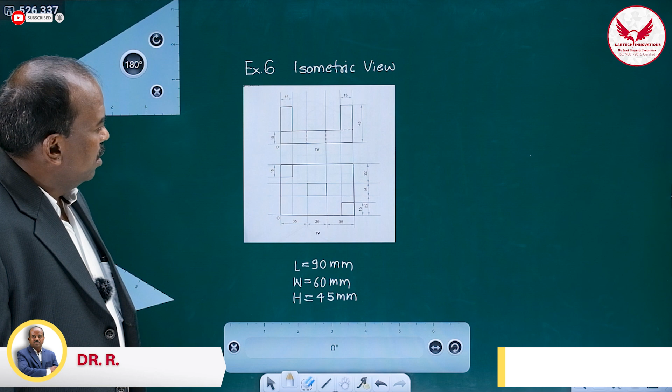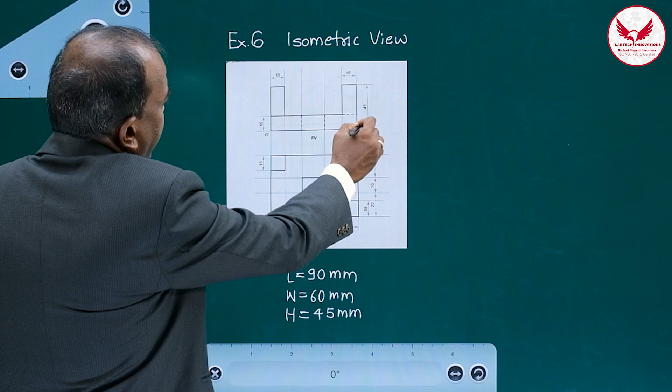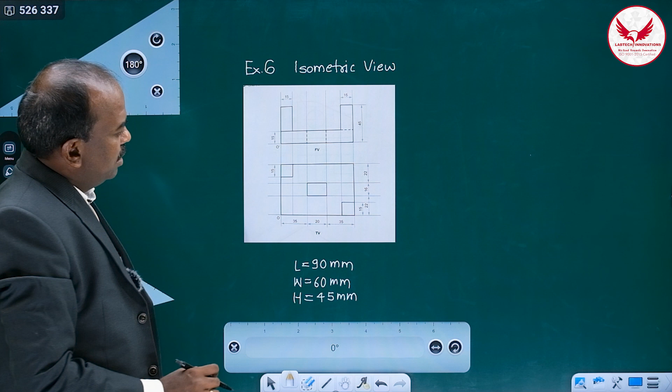Hello friends, now we'll see the isometric view when front view and top view is given. The object in that way is simple, but if we understand the orthographic views thoroughly, then drawing is always very simple. So if we see the length of this object, it is 90 mm, height is 45 mm. I have written length is 90, height is 45, and width is 60. So these three dimensions, while drawing the isometric view, are very important.

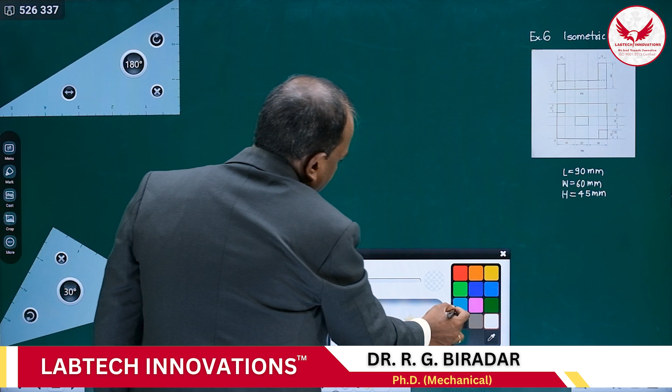And once we mark these three dimensions, then what we can do? I hope all those dimensions are visible. Length is 90, width is 60, height is 45, origin is on left hand side. Then how to prepare the isometric box? Once again, I'll repeat the procedure like earlier examples.

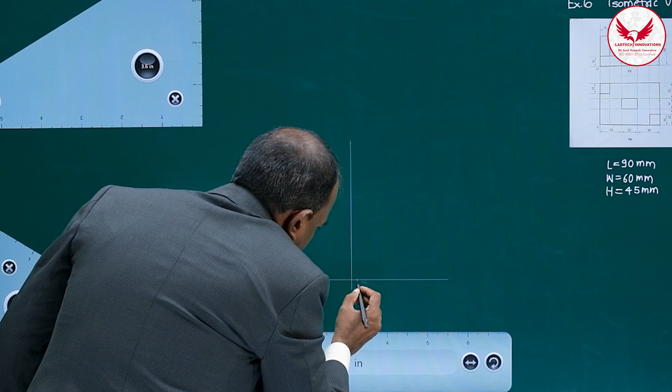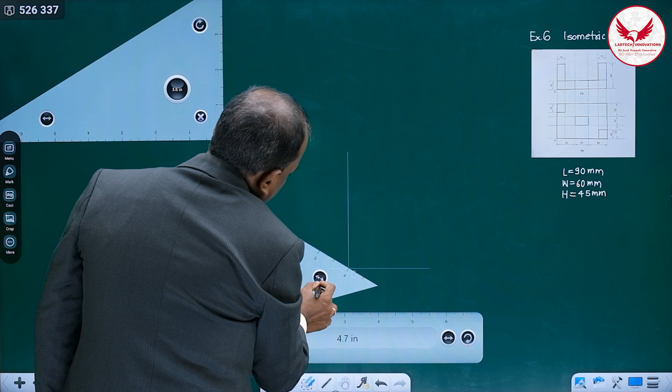Mark the horizontal line, then mark the vertical intersecting line. Once we mark these two lines, their intersection is going to be the origin. So it is the origin. After marking the origin, on both sides of the origin mark the 30-degree lines. So one on this side, and the other on the right hand side. Then after that, marking length, width and height is very important.

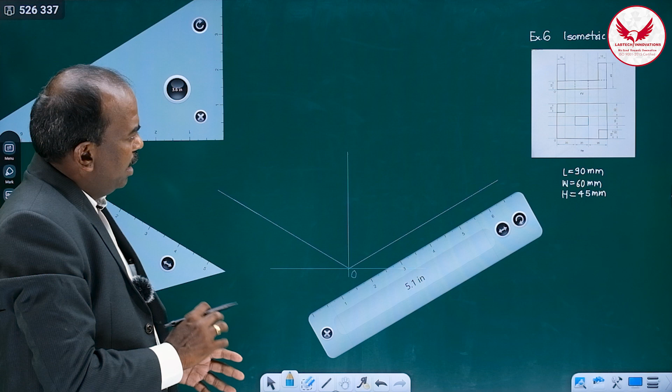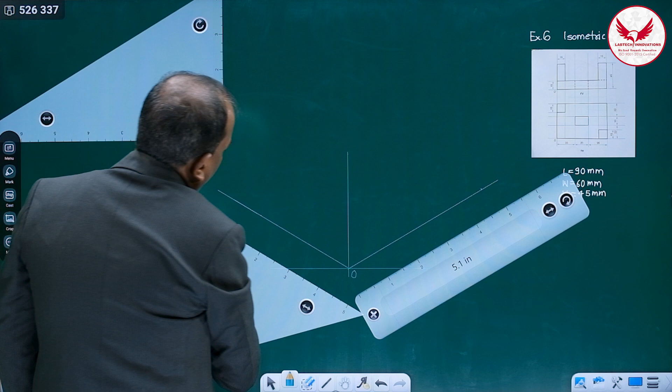Length is 90. We can mark length 90 on this line with the help of scale. So it is going to be 90. Similarly, width is 60. So it is going to be 60. So I have marked length and width, and a very important thing in this is marking the height. Height is 10, 20, 30, 40, and height is 45 only. We can mark the height.

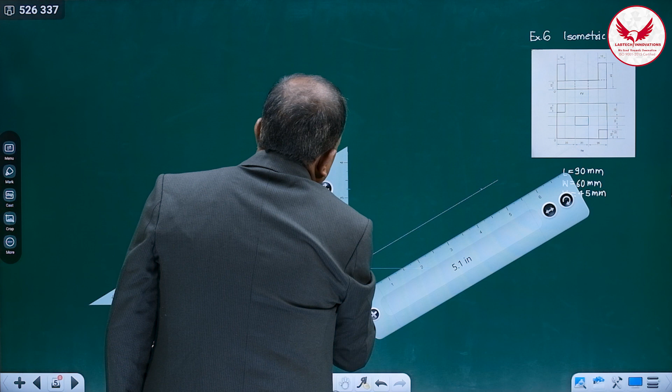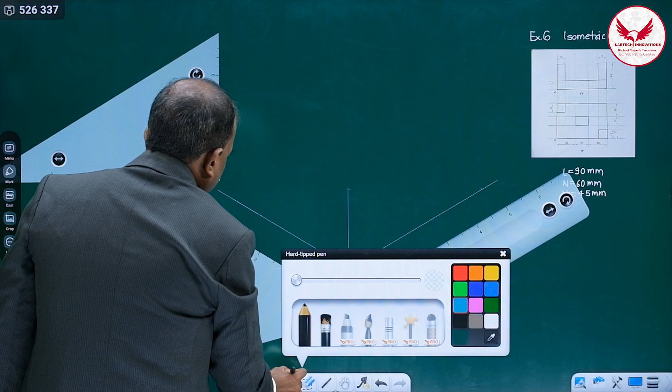And after marking height, for preparing the isometric view very fast, what I'll suggest, once you mark the height, remove the upper portion. It will help you a lot while preparing the isometric box. Wherever you have marked the width, from that draw the vertical line. If you extend it, it will be useful. Again, wherever you have marked the length, from there also mark the vertical lines.

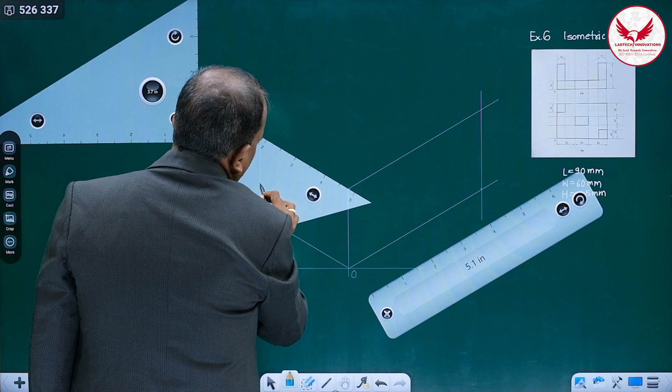Then afterwards, mark the line parallel to the length from this height towards right. Then towards left, it is going to be width. Wherever these intersections are, from that also draw these parallel lines. Even if these lines are extra, no problem, because these are very light. So this is the isometric box, and our object will be in this portion only. It will not be outside this.

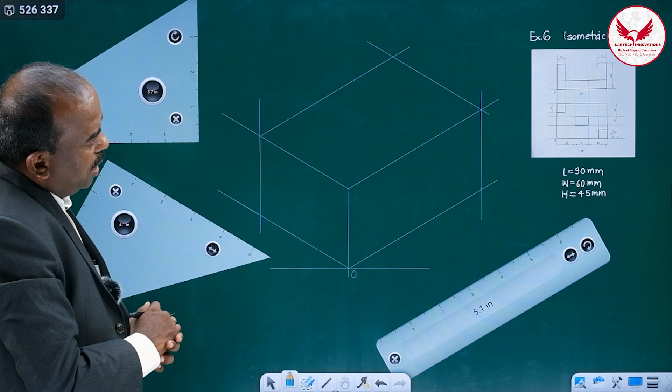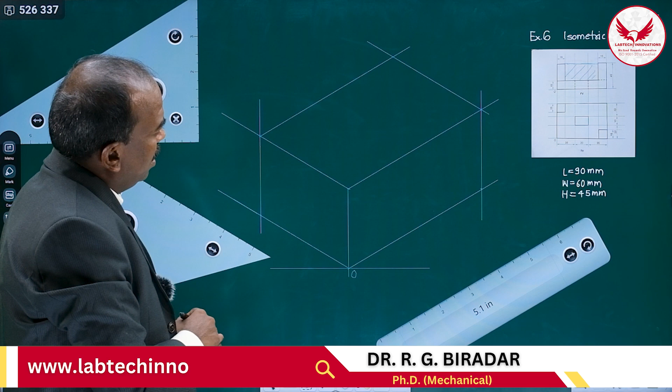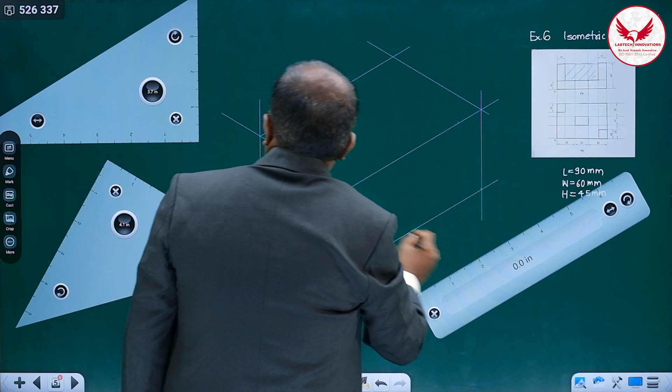Again, one logic I'll use over here. If you see the front view, a major portion of the front view is not existing, especially this portion. So if you find this part is not existing at all, can we remove that portion directly from this block? So we'll get some basic shape. How much can we remove? Leave 15 mm from both sides, 15 mm from this side and 15 mm from this side, and its depth is 30.

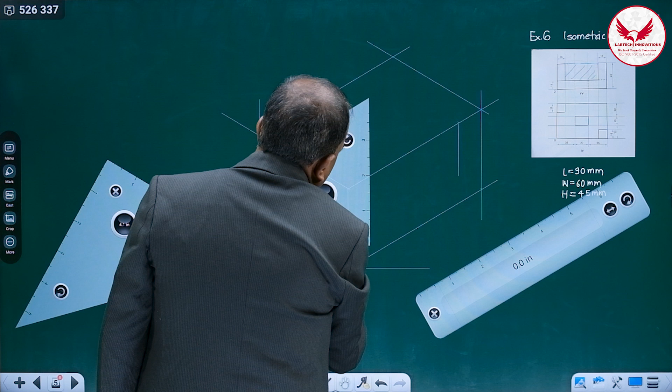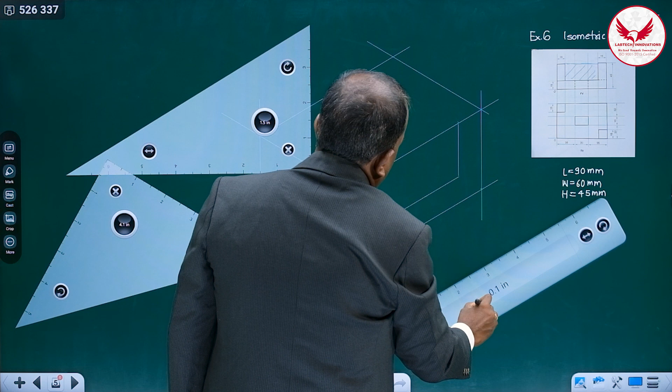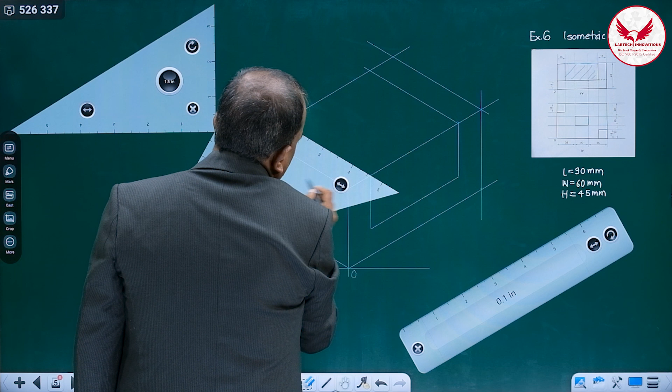Its depth is 30: 10, 20, 30, like this. Means again there will be a gap of 15 on the lower side. So from this side also mark it, 10, 20, 30. Mark this, and this portion we have to completely remove. Whatever this portion is, we have to cut it completely. How can we cut it? Again, parallel lines throughout its width, like this, here also and here also. Whenever there is such a rectangular cut, it is quite simple.

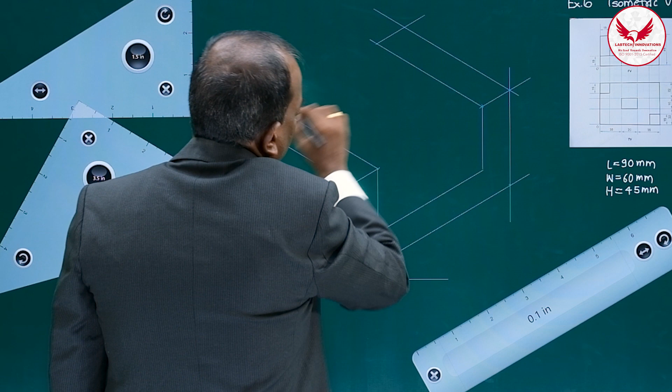But when we have to remove this, what we'll do? We'll cut it. This portion completely we'll have to cut. And then there will be 3 additional lines we'll have to mark, because these are going to be the edges. Here only 2 edges are there. This third edge is going to be there, and its depth is actually 30. 10, 20, 30 means it will be up to this only.

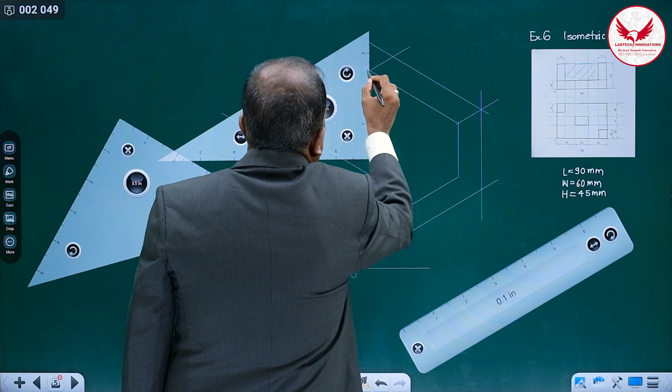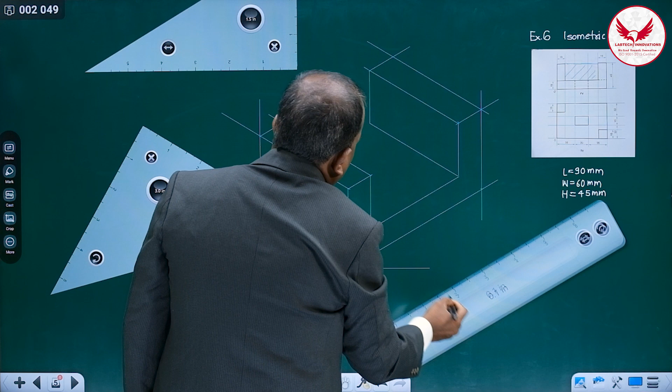So instead of marking extra, if we mark the correct line, it will be better. 10, 20, 30 means from this edge, if I mark, it will match with this, and if I mark this edge, it should be like this. See what I have done. This portion I have removed from this block. It will help us a lot to solve this example in a simple way.

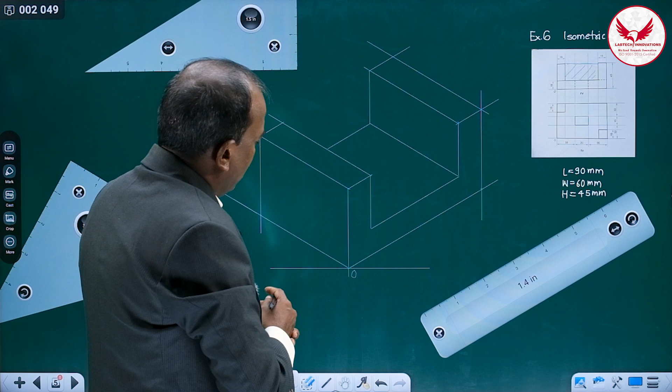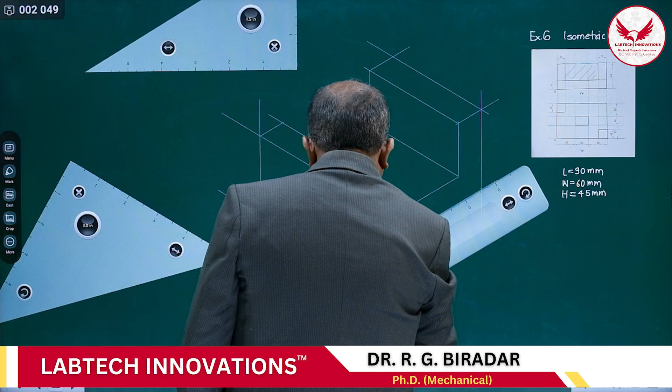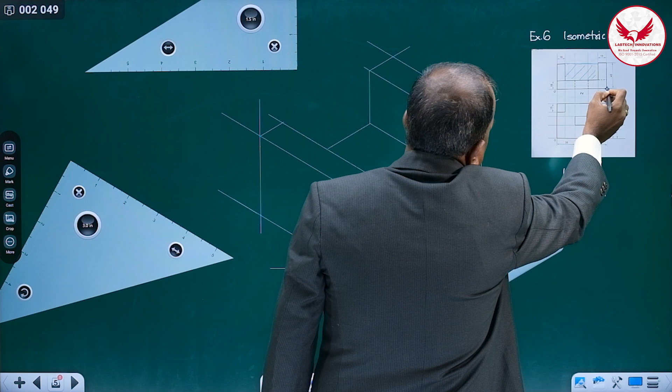Now from the origin, towards right, this line is throughout, it is 90. I'll mark it. From the origin it is 90. Then if we see above 15, this line is throughout. Here there is a dotted line from the completely right hand side, so there is a straight line, means a single surface is there, nothing else.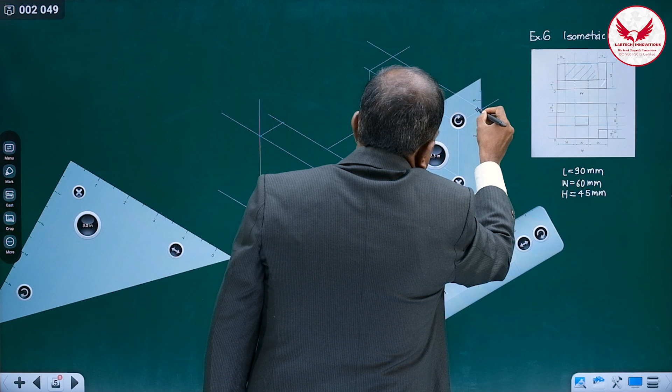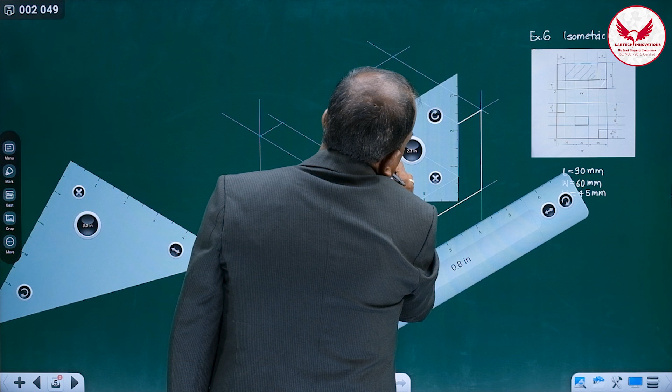So we'll have to mark this line up to this, throughout that 45. And if I mark 45, then it is 15. Its depth, if you see, is 30, and we are finding this line throughout. That means if we start from this, it is throughout.

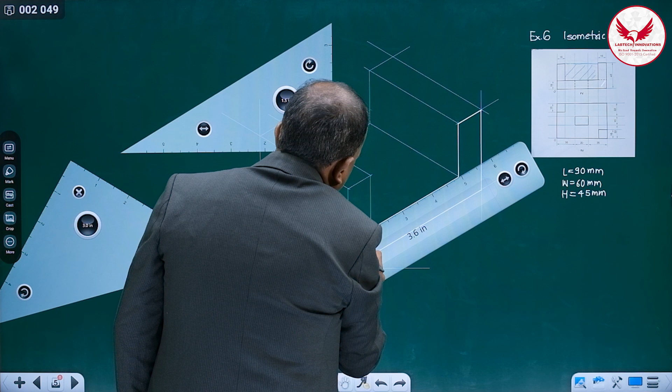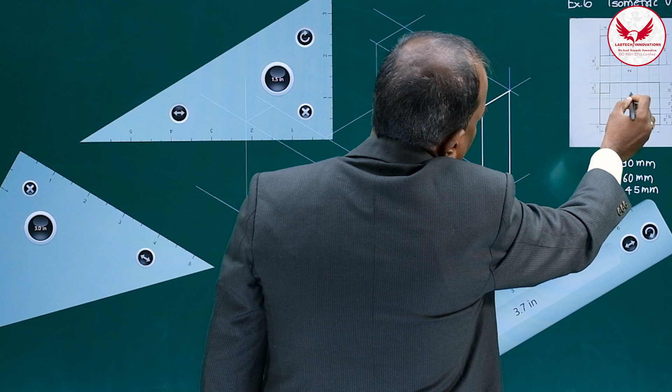So it is like this. And if you see the top view, here there is a square, here there is a square, here there is a rectangle, and that rectangle indicates that it is a hole. Above this nothing is there, means centrally this rectangular slot is there. So this square and square. So now it is confirmed that this square is at the frontal side. The dotted line will be behind.

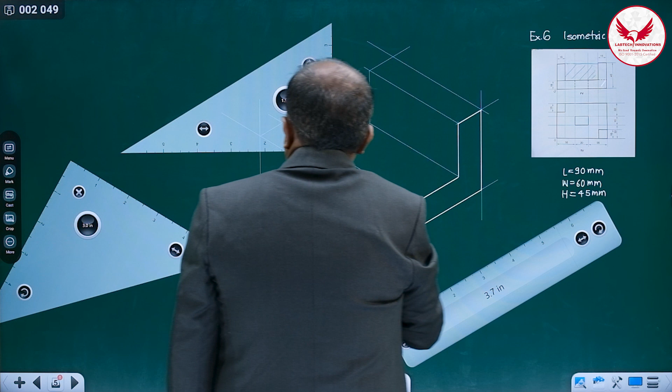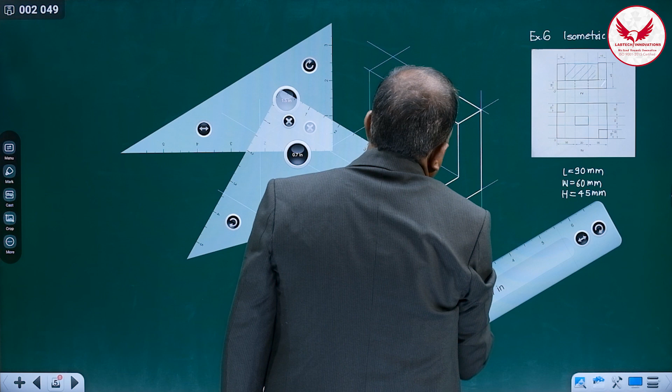Then prepare this square. How much it is? It is 15 by 15. That means from this, if I mark 15 like this, then again from this also it is 15, and then it is a square. In the top view you can see it, its location also.

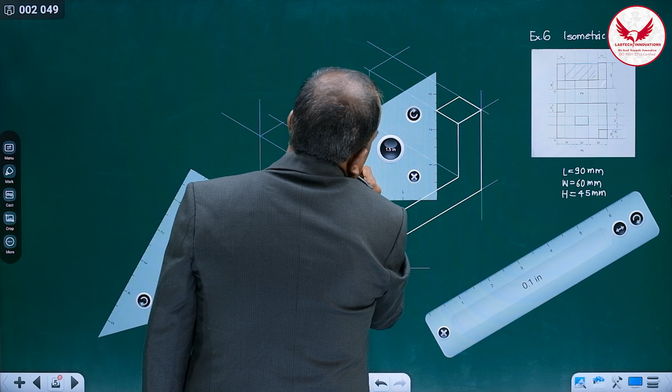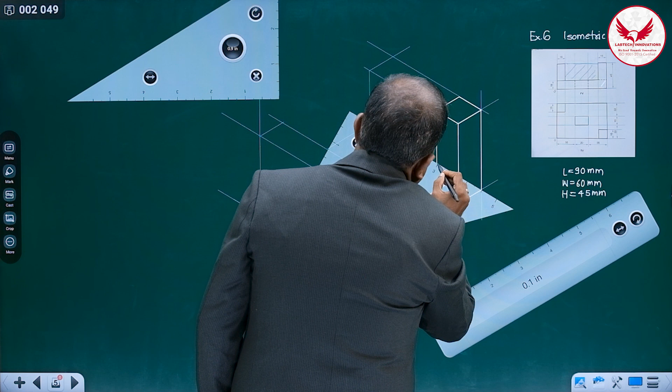It will be like this, and its depth is going to be 30. It is 30. It is something like this. Then we can mark this edge is missing over here. It will be like this. And whatever this dotted line is there, that hidden edge is going to be there.

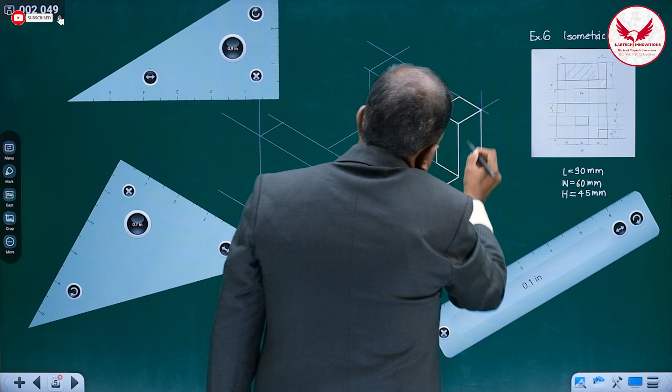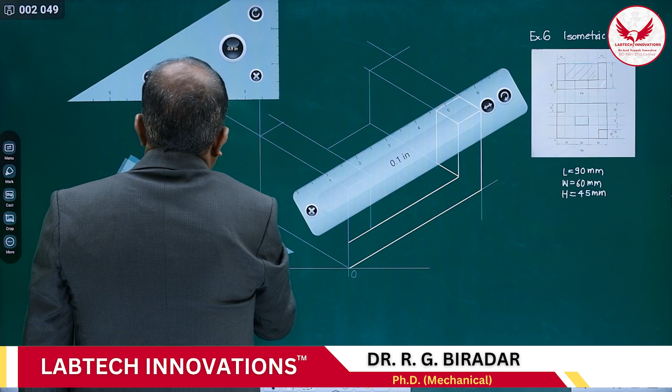So this column is on this side, and here, so it is angle shape, means this surface is single, and above it there is a partition, means this portion is not in this level. If you see now the top view, it is right at the back side, so this portion we have to remove, and right at the back side again there is a square column. So we can mark this.

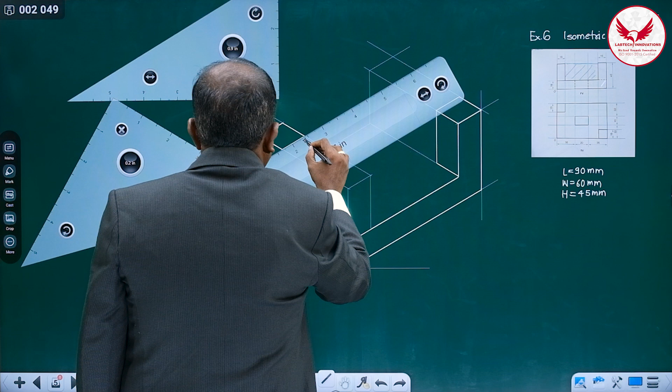It is 15, it is 15, and it's 15. It is 15. Now we know its depth. Its depth is 30 only. So what we are supposed to do from this, mark 30. Correct. Here also again we have to mark 30, depth of this column.

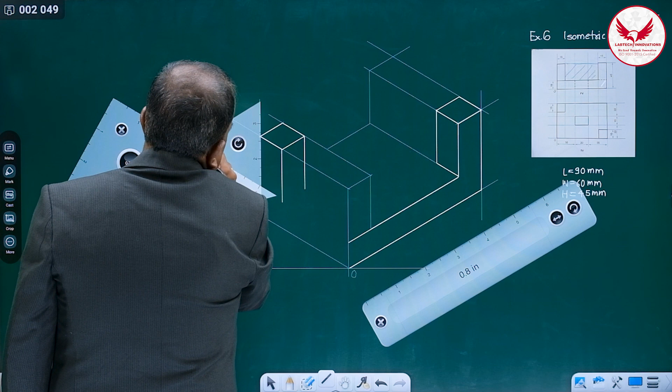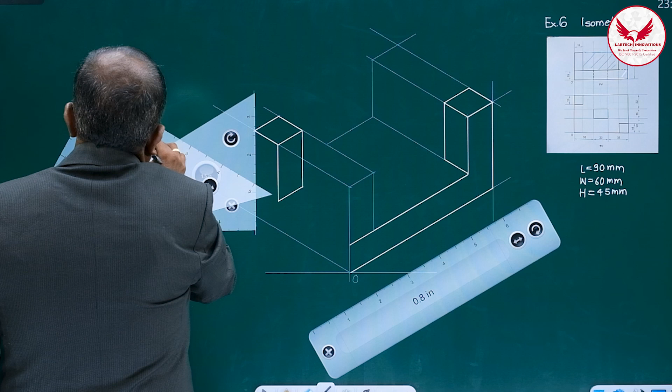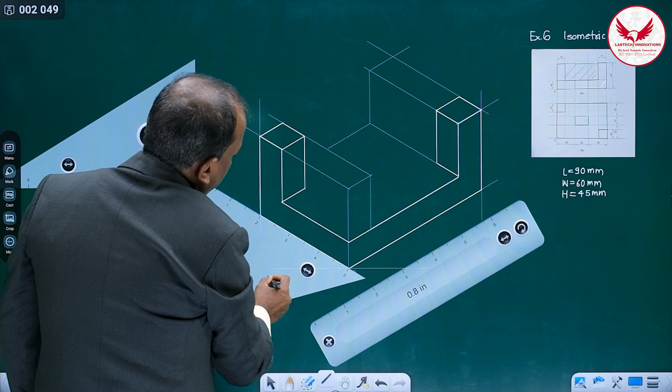And if we mark this, it is going to be a column. And if you see this top view, such complete surface, neglect this slot, then how can we mark it? With the help of this edge, if I mark this, it is like this. Then its height from the back side is throughout 45, and width 60. Width is 60. This vertical edge is remaining.

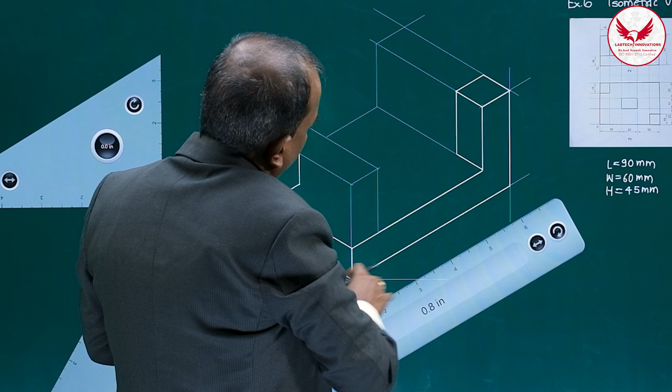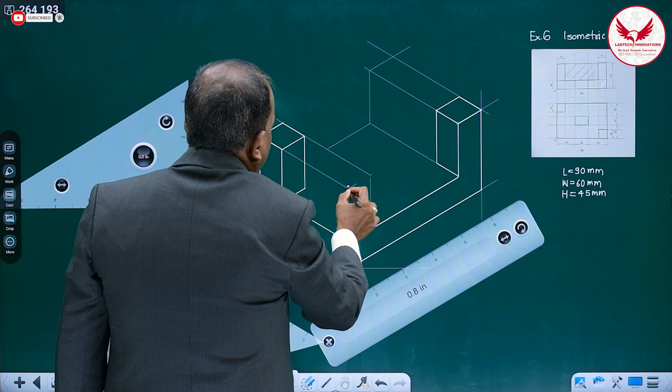This vertical edge is remaining. Then here also, what I'll always suggest, whatever this portion is there, you have to remove the light portion, then this object will look very nice. And after removing it, some additional dark lines you will have to mark, that you can easily mark. So this portion is not existing at all. So if something is remaining, no problem, anyway it is a light line. But for our understanding, I am removing it.

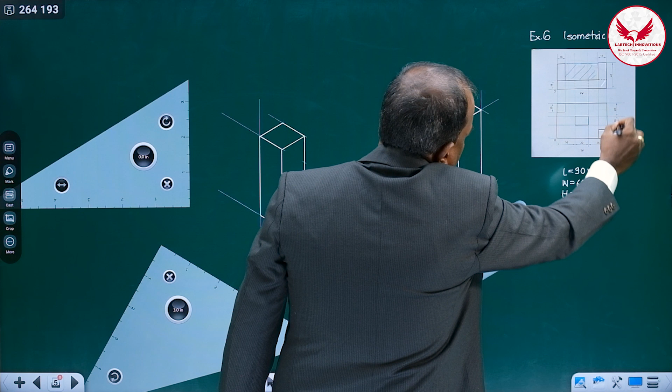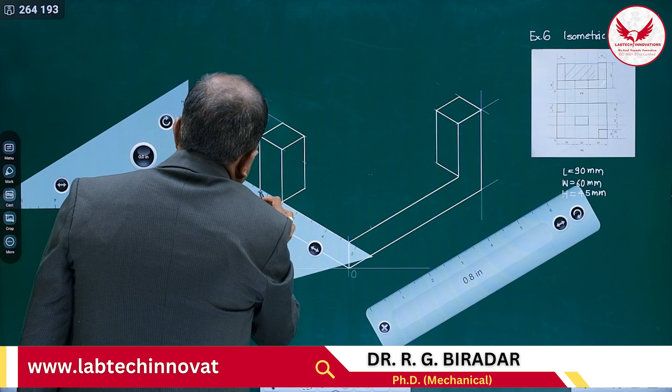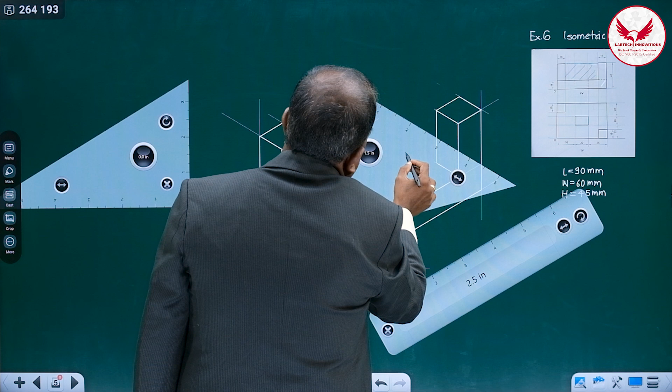And now, for drawing completely this rectangular shape in the isometric, first I'll have to mark this light line. Its complete portion is going to be like this. And here also, for your understanding, I am marking the light line. And whatever parallelogram we get, it will be something like this. And in the remaining portion you have to mark. And now I'll make this part dark. It will be in this way.

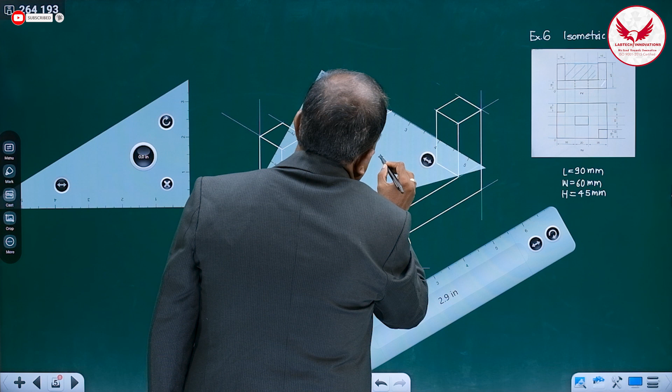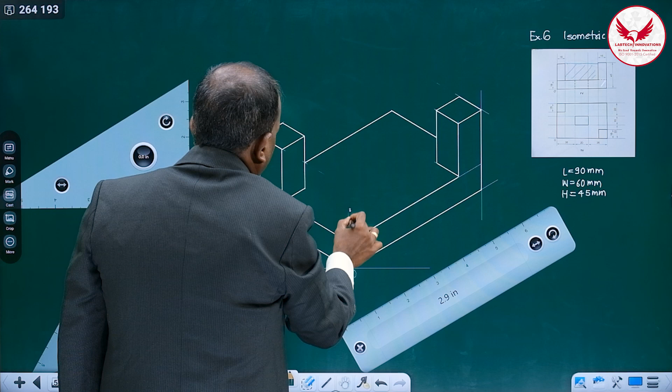Isometric is quite interesting if we understand and follow the proper practice. Whatever visible portion is there, that we have to draw. See, this object is something like this. Only what is remaining over here is the rectangular slot. Then for marking the slot, what will be the best practice? See, 20 and 20 on both sides, and it is 16, and from this side 35, 35. So we have to mark this.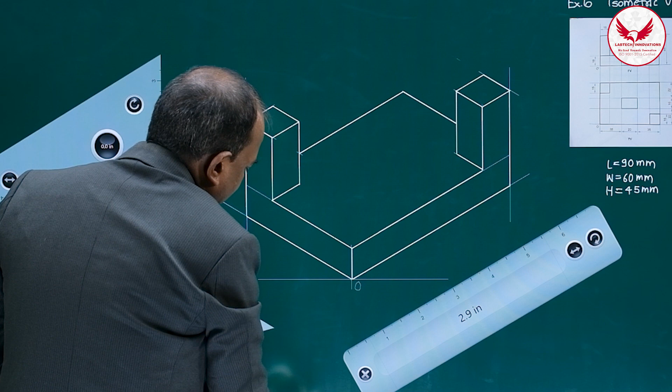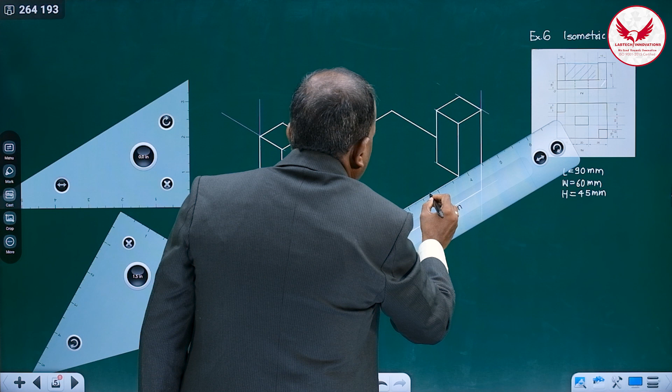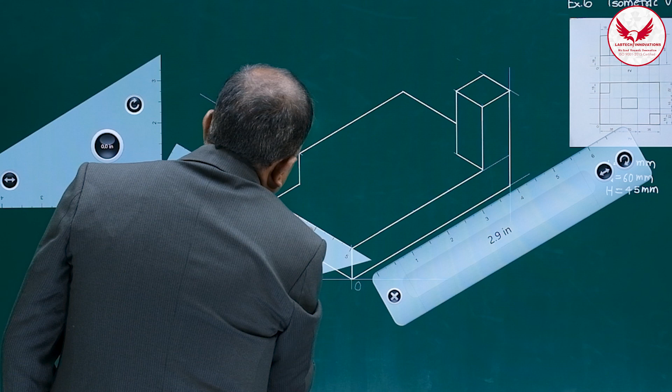How can we mark it? First, it is 20, means we have to leave 35, 35 from both the sides. It is 10, 20, 30, 35, this point, and then 10 and 20, this point. Just mark it. And over here, we have to leave 22 from both the sides: it is 20, 22, the point is over here. And from this also 22, so the remaining 16 mm gap is there. Even if you mark this light line, no problem, it is a very light line.

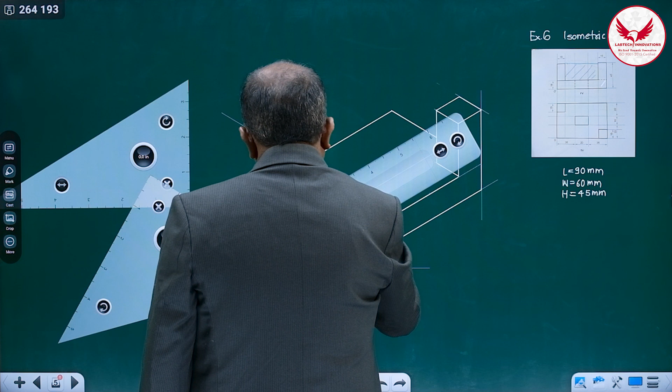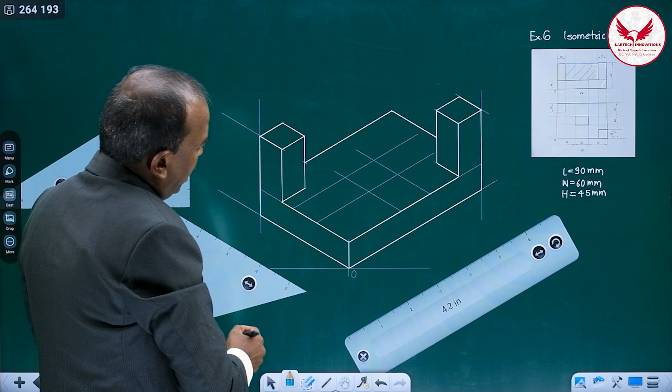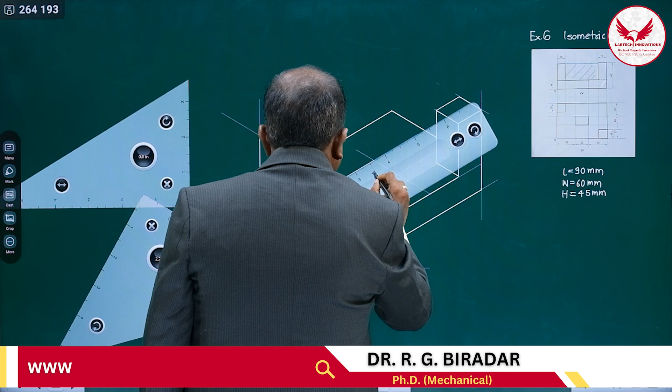Like this. So it is 16, and from this it is 20. So centrally we'll get the slot of 20 by 16. So it is 20 by 16, make it dark. It is 20, it is also 20, and it is 16, and it is 16. So we have marked the rectangle.

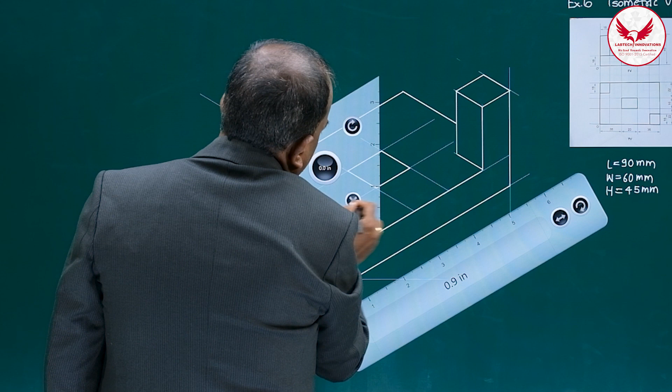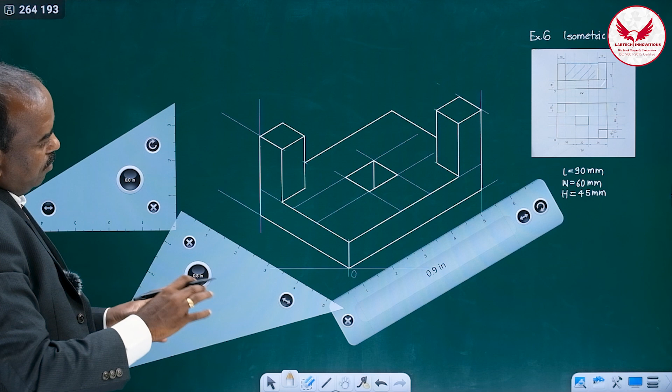Now its depth is how much? This depth is 15 only, so here these three edges are going to be hidden, but this edge is going to be visible, and from this we have to mark perfectly 15, and I think it matches perfectly over here. If it is not matching, then two edges will be there. So this is the isometric view of this given object.

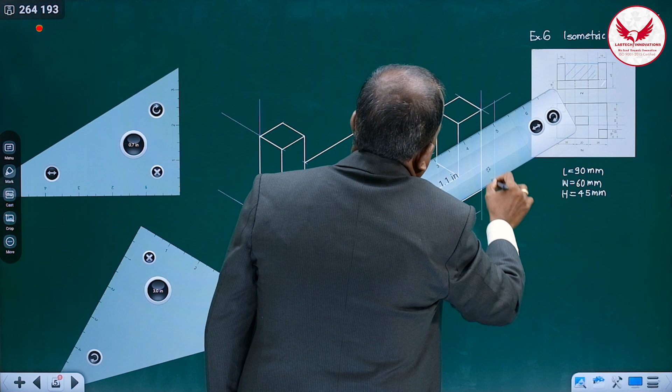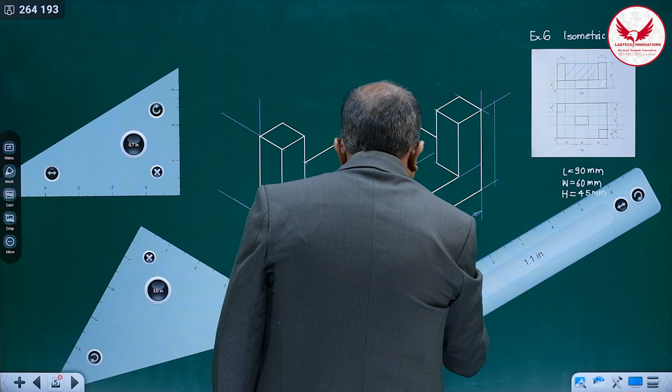And don't miss dimensioning. You have to draw the proper arrow. It is 60, centrally above the dimension line. And in isometric view, always give the overall dimensions only. It is 90, and it is 45. So this is the isometric view of the given object.